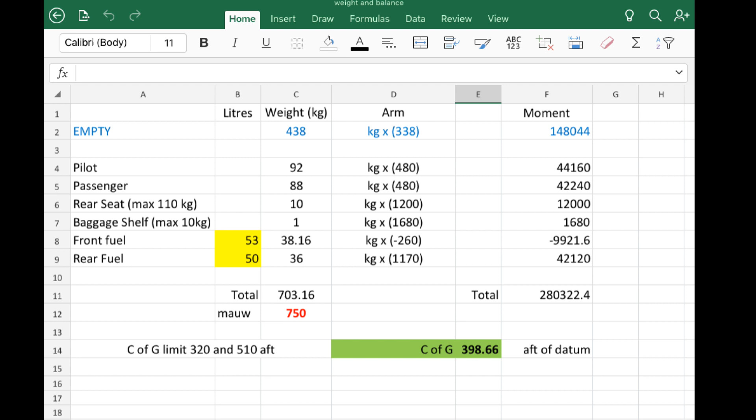In this video I talk about the loading points of the Jodel. I explain how I came to make up my spreadsheet. I give a shout out to a brand new YouTuber, and I compare my last 4 landings at Nayland.

This was a very short flight I did.

After the permit, changing the oil, I did an extensive ground run, but I also like to do a short air test to make sure that I haven't got any leaks.

It's been a very busy week, but unfortunately not a flying week as such. So what I thought I'd do this week is answer 1 or 2 people's questions about that spreadsheet that I included some time ago.

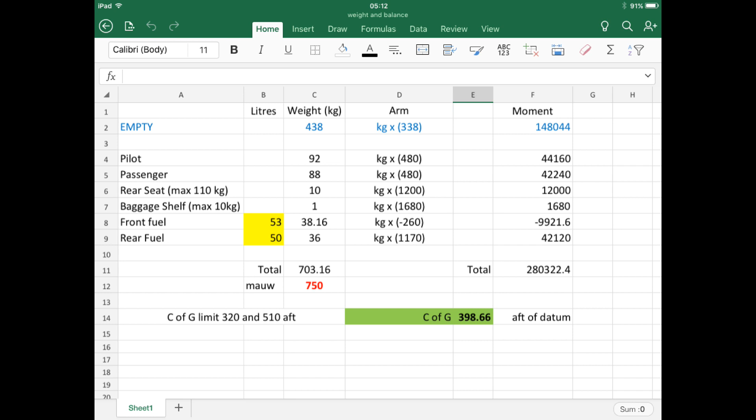Before I go into any detail with the spreadsheet, I thought I'd take you back to the weighing process.

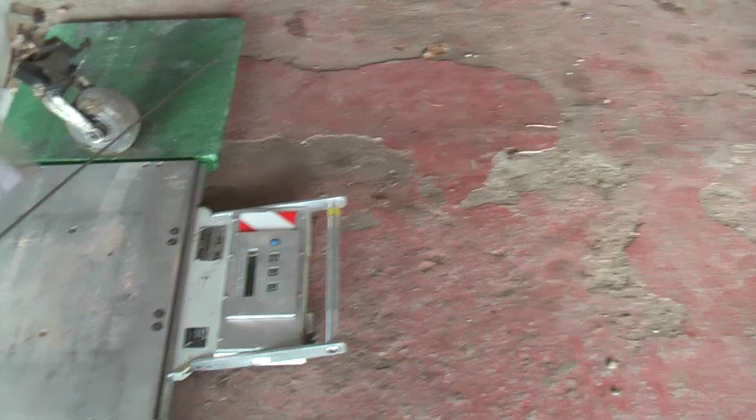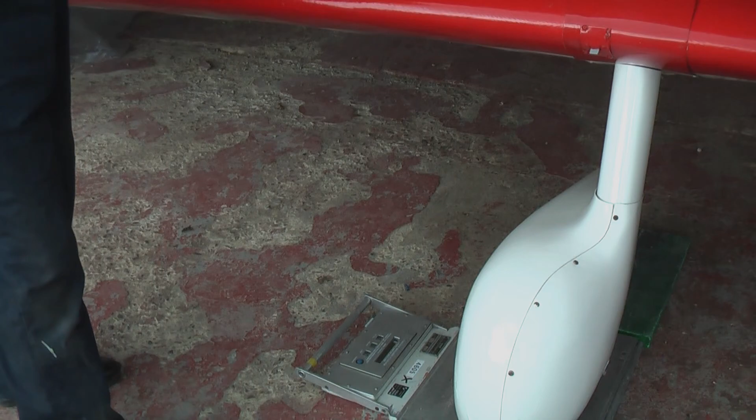Okay, we'll come forward again. Go forward. Are we there? Yeah, that's good. A very strange... I'll have to get that after. Right, we need to close the door now. We need to close the door because we're going to work out the centre of the CG.

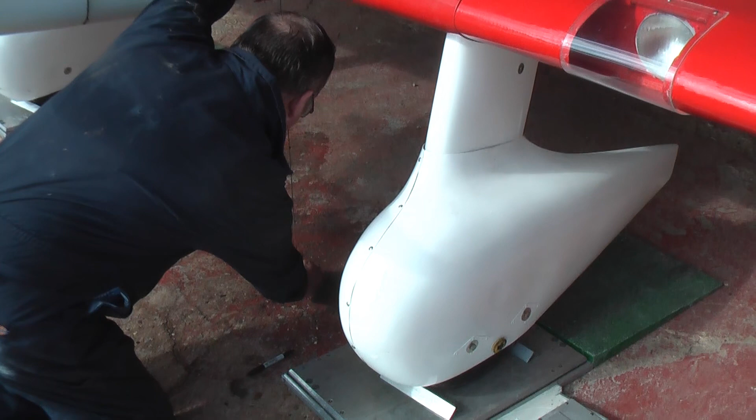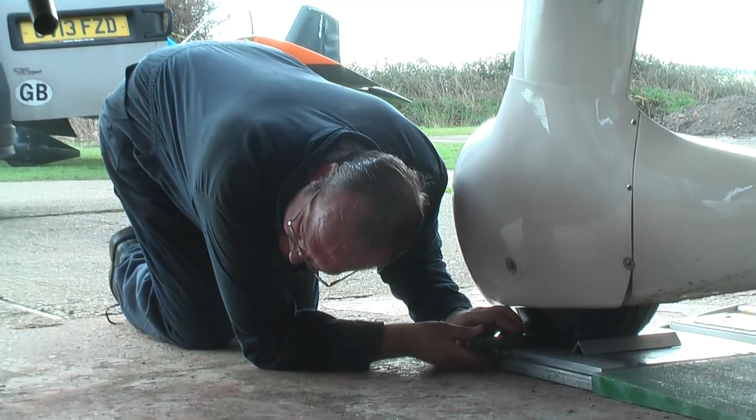So first off, let's take these figures. Move forward with fuel. And it's normally the same culprit. It's not you, is it? Right, bolt holding the aerial, and I mark the floor. So I'm going to go from the centre of that bolt to the floor. Right, ready when you are? That's it. There you go.

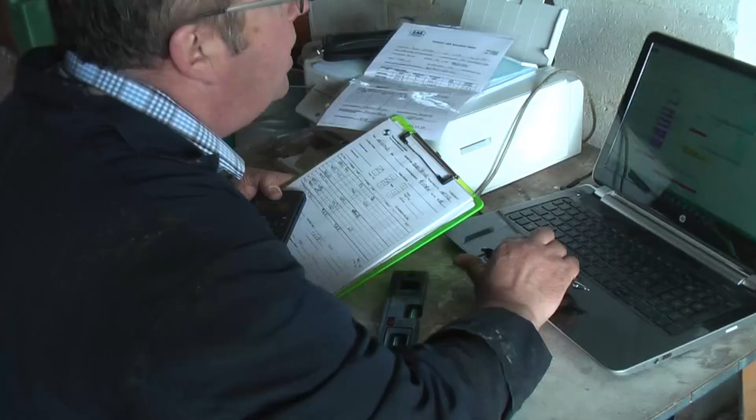What I'll do, I'll use the raw data we got and see where the CG comes out and see if it's anywhere close to what we had before. That's going to be 7450. Yeah, it's gone back an inch from the CG. That sounds about right with what you've done to it? Yeah, we took the big heavy generator off it and the big heavy starter off it, put lightweight ones on.

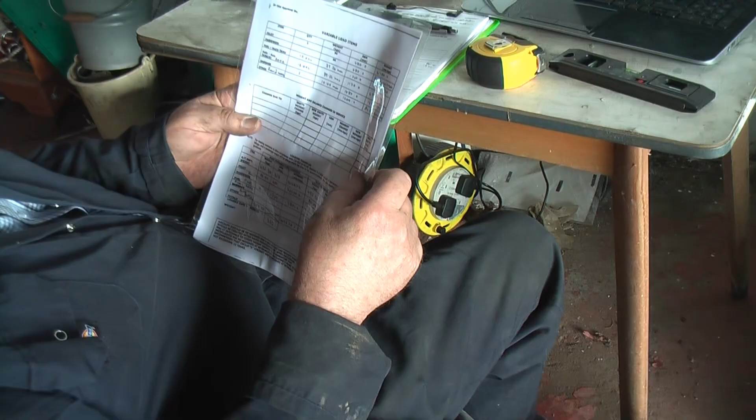From Kirkbride to Bodmin. And your weight, you're a little bit lighter than average, in fact. You're a little bit lighter than average. Well, that's what, 964. We've got a relatively lightweight paint finish on it and a relatively light engine base. You're about 15 or 16 pounds lighter than an average. Yeah, well, that's good because that's what we're basically aiming for. That's brilliant, yeah, I'm more than happy. Okay, cup of tea time then.

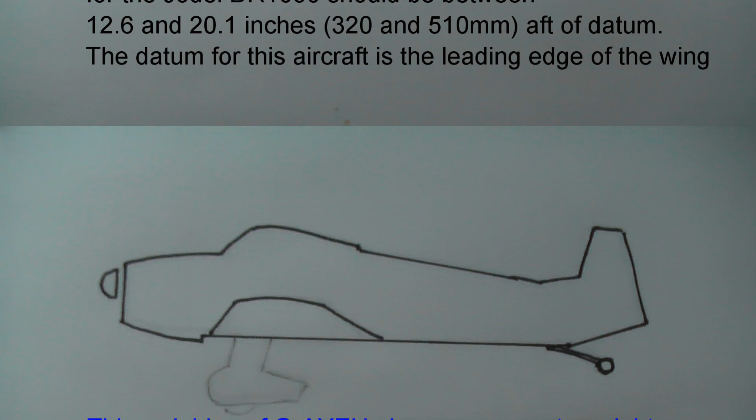According to the paperwork, the centre of gravity for the Jodel DR1050 should be between 12.6 and 20.1 inches, that's 320 and 510 millimetres aft of datum. The datum for this aircraft is the leading edge of the wing. This weighing of Golf Alpha Yankee Echo Hotel gives us an empty weight of 967 pounds, that's 438 kilograms, and a basic centre of gravity of 13.32 inches or 338 millimetres aft of datum.

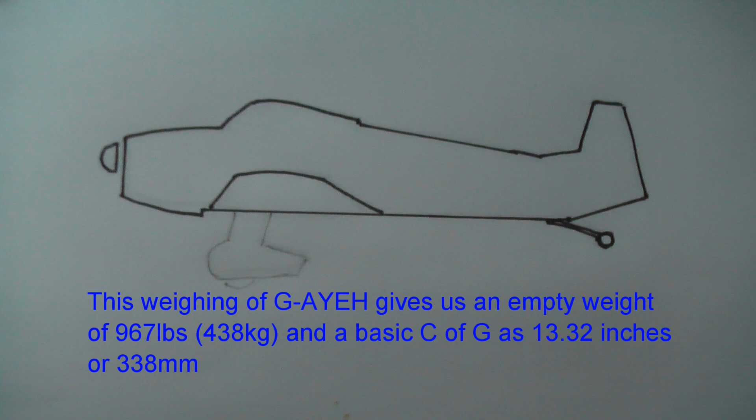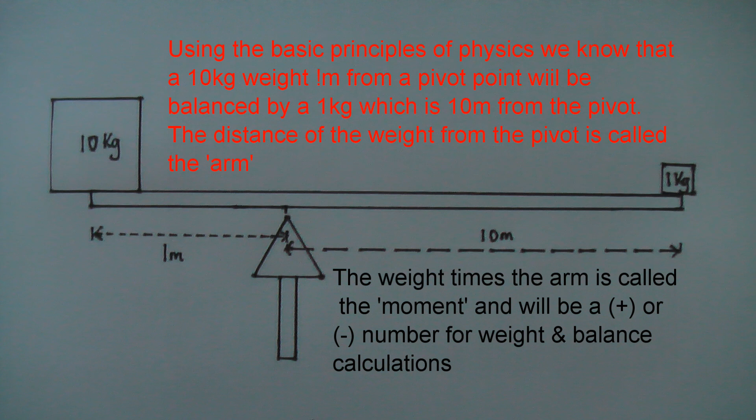Using the basic principles of physics, we know that a 10 kilogram weight 1 metre from a pivot point will be balanced by a 1 kilogram weight which is 10 metres from the pivot. The distance of the weight from the pivot is called the arm. The weight times the arm is the moment, and this will either be a positive or negative number for weight and balance calculations. This diagram shows the 5 main loading points on the Jodel DR1050 along with the positive and negative moments.

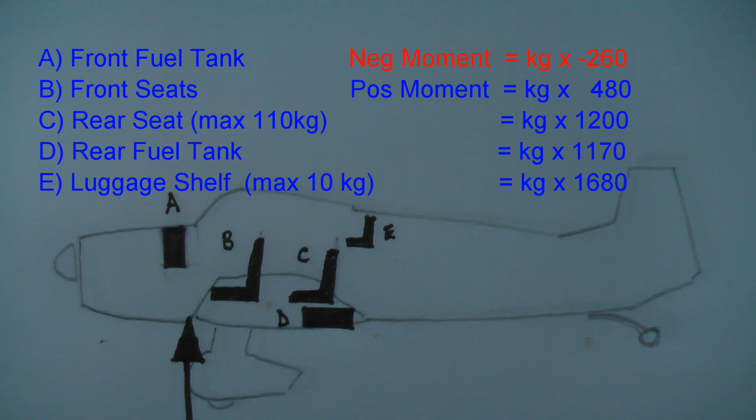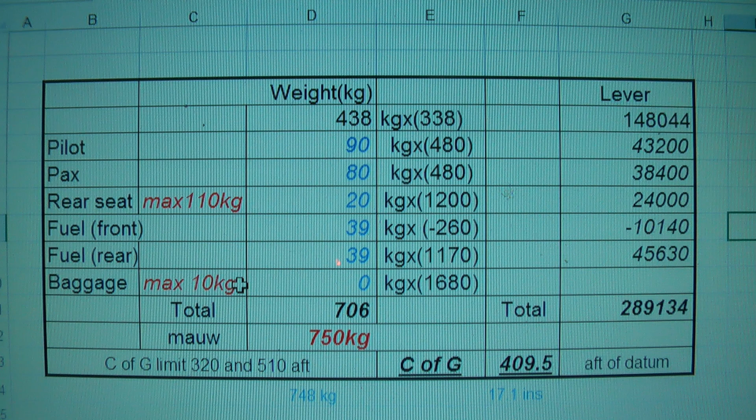This is the spreadsheet as it appears on my laptop, but I said I'd talk my way through the spreadsheet as it appears on my iPad, so that looks a little bit different. Many of you will know exactly how the spreadsheet works, but for those that are not so sure, I'll have a go.

Basically, a spreadsheet is made up of columns, which go down, and rows, which go across. A lot of the cells, the individual squares, don't actually carry a formula; they're just there for information. So if you look in column A, it's just the various loading positions. In column B we've got two numerical values, the amount of fuel in litres. Weight in column C is again just numbers. The arm in column D is just for information, and you'll find out in a moment what happens in column F with the actual moment.

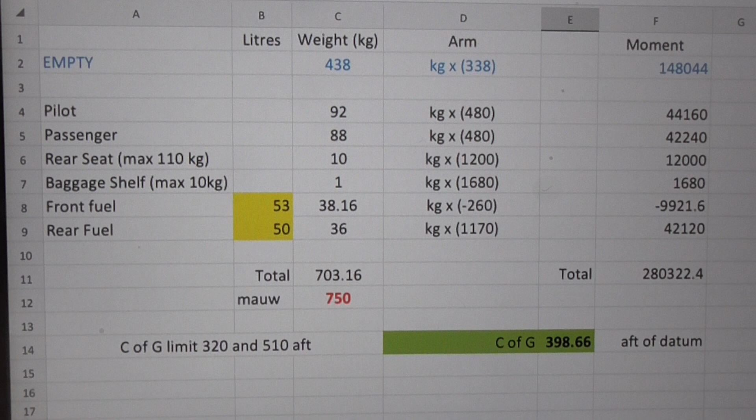In row 2, that's the information taken from the basic weighing. So what we need to do is find out the formula for this cell. To find the moment for this loading position, we multiply the pilot's weight, in C4, by the arm, listed in D4 at 480, to give us a total moment of 44,160. This is then repeated for each row right the way down until you get to the two fuel rows.

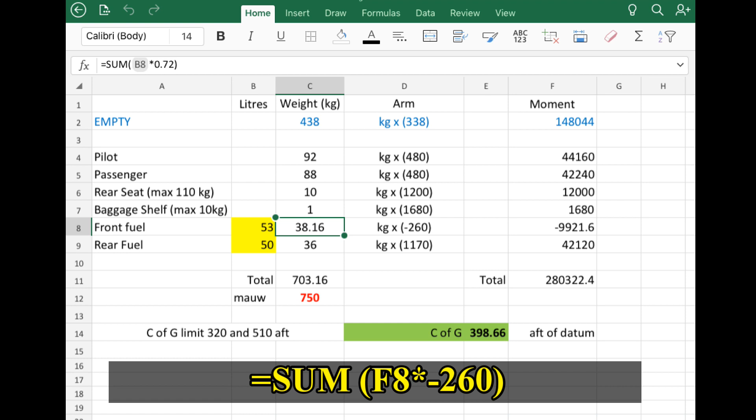Here we set up a formula in C8 to find the weight of fuel in the front tank by multiplying its contents, B8, by 0.72. To find the moment value for the fuel, we then multiply C8 by the arm, which is minus 260, minus because it's forward of the datum point.

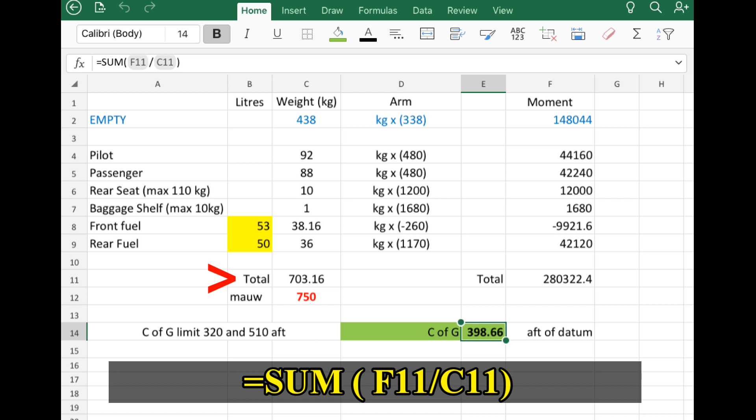We can then find the total weight in C11 by adding the cells C2 down to C10. The total moment F11 is calculated in exactly the same way, with cells F2 down to F10. The last stage is to work out the centre of gravity, done by dividing the total moment F11 by the total weight C11. In this instance, it's 398.66, which is well within limits.

I think we need a break from numbers, so I thought I'd end this video with a comparison of my last 4 landings at Nayland.